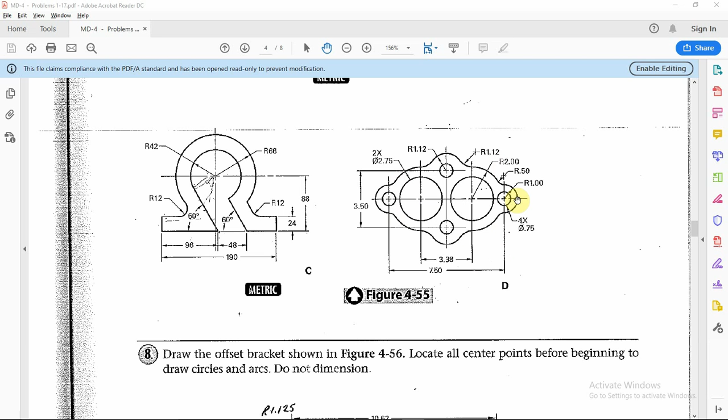So Imperial, about 7.5 wide overall, 8 or 9 wide. Height 3.5, about 5 wide. That's probably what I'm going to start with. So I am definitely going to start with these center lines. Now I have one horizontal. I have another two, what I'll call secondary horizontals. I have this primary one here. I have then a couple secondary, and a couple other secondary or tertiary, whatever you want to call them, doesn't matter. I'm going to start with the primaries, one horizontal, one vertical, to get things started off.

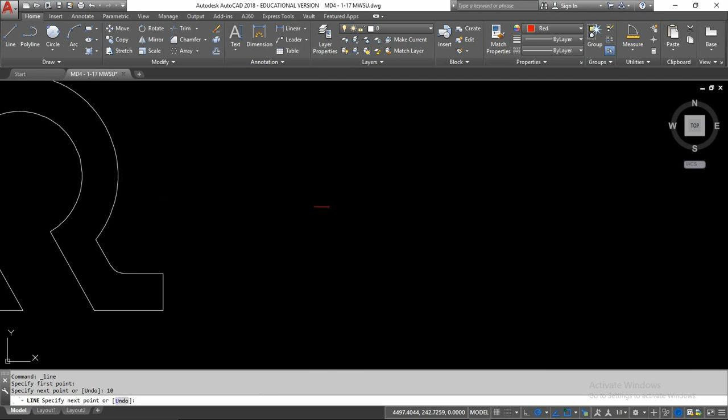So, okay, here we go. I'll go ahead and change, and this is Imperial, so I'll just start here and I will type over 7 point, no, I'll just make that 10 for now. Zoom in, and then I will do a vertical. I'll do 6 for now. Again, not really that important. You can always change it at any time.

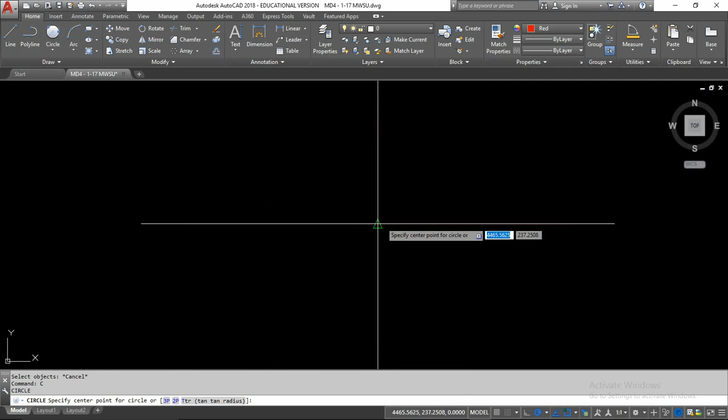Now I'm going to go ahead and do the other hidden center lines. So I'm going to go ahead and copy. Now, how far is this? Well, I'm not totally certain. I can do the math. I can divide it by 2, whatever it may be. Again, I've told you before, I like to do circles. Diameter, where that circle intersects either of those lines, is the location of the other vertical or horizontal center line. So I'll say 3.38, and copy here.

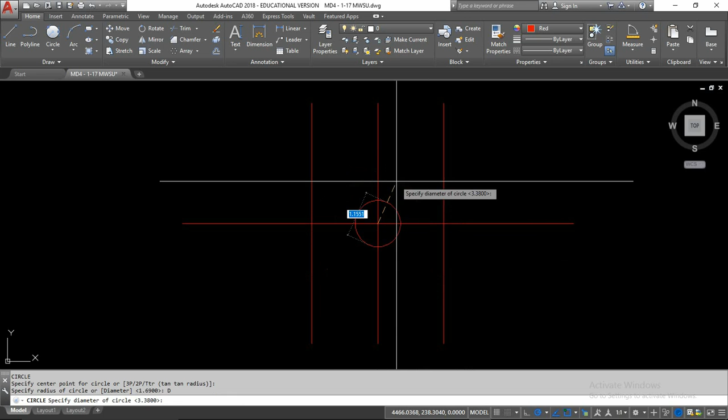Now let me go ahead and show you offset again. It's asking a distance. If you don't know the distance, you can draw it, and this one would be good to say that distance and that same distance there. The next one is, let's get rid of that circle, and let's do, again, diameter 7.5. Now I'm still doing the vertical ones. In this case, I'm just going to copy them. I don't really have enough to where offset would benefit. Again, delete. And then the horizontal, again, I'll do circle diameter of 3.5, and then copy here to here and here.

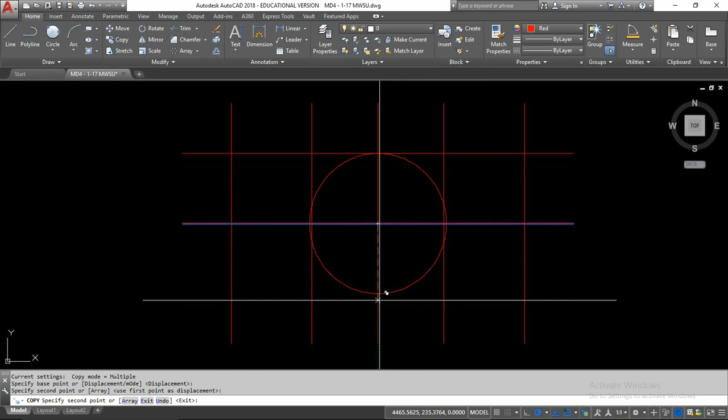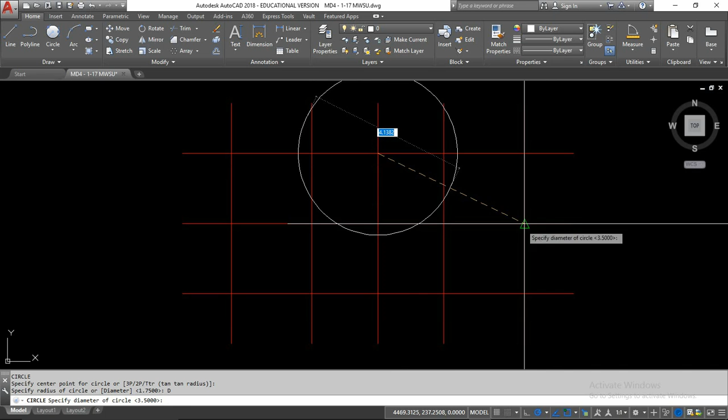Okay, so there are all my center lines. That's pretty busy in itself. And let me go ahead and change this back to by layer for color. Circle, this being the center one, the only one that exists with these are these two here. So I'll go ahead and do that. It's hard to find. There is not a dimension on this circle. It's actually located on the one over here. So 4x 0.75. And then I have one here, here, and here. Okay, starting to take shape already.

I know the larger circles are centered at the intersection of these two. So here, diameter of 2.75, and right click, click, right click. There I have that. Now, entirely up to you if you want to delete these lines. If they're getting a little busy for you, not a problem. Go ahead and delete them. You can always very quickly put them back if you change your mind. Right now, they're not bothering me.

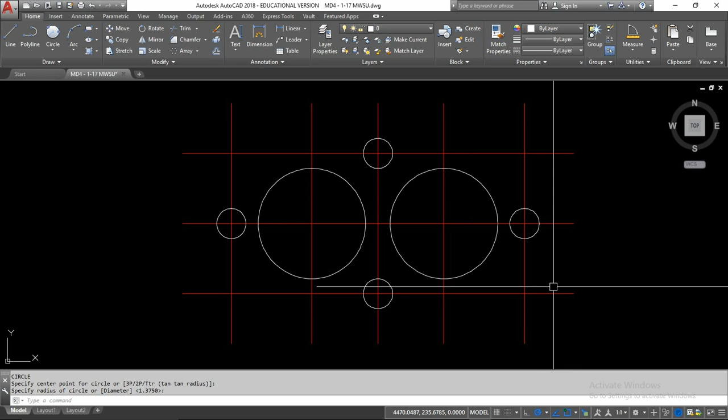So what else do I know is true? Well, the outer frame of what I would consider a gasket, that outer line, they are all arcs. They're either fillets or arcs that are concentric to each of these circles. So again, I'm going to do them as circles. And since they're arcs, they're asking for a radius. That'll be 1. 1. Now, if you want to do all of these and then go back and trim them, or trim them as you go, that's fine, entirely up to you.

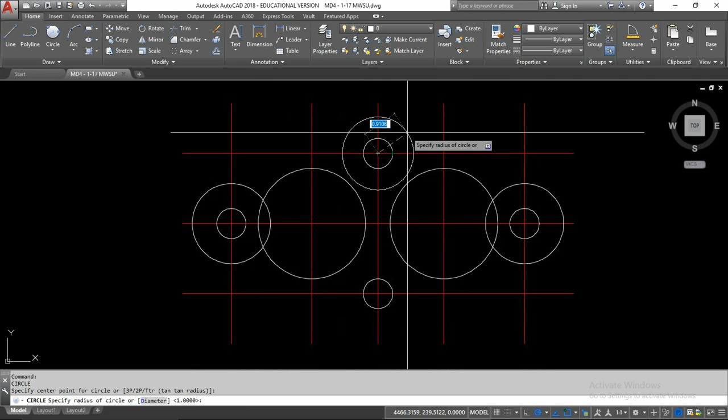This, did I click that right? Yes. And this is a 1.12. And then these two here are a 2. Okay. Now, to trim, I'm going to use these outer circles as my trimmers. That way I can just select these here. Make sure you don't accidentally select something else. Now notice I still have that little piece inside of there. Don't care. I can come back and easily erase that later. Right now I'm just wanting to make sure I get these done properly.

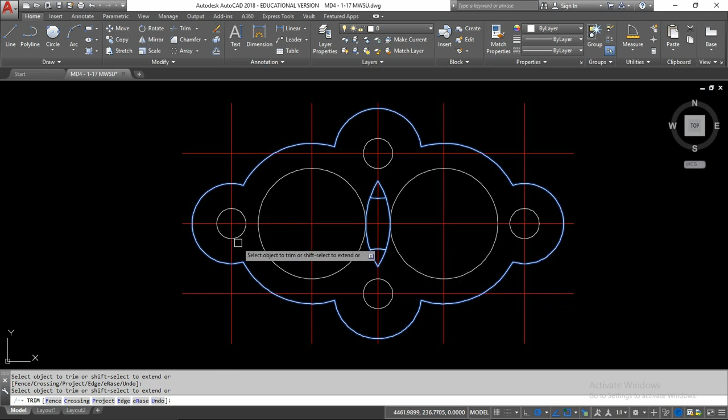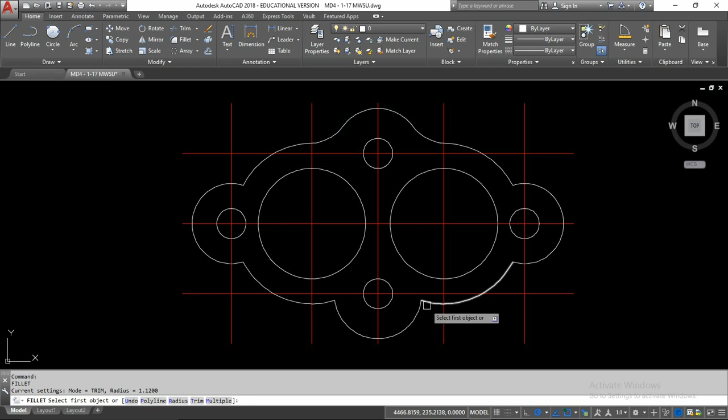Okay, now I've got this little football or whatever that is. I'll just delete that. And I'm pretty good. Now all I have left is the arcs that are fillets, or the inverted arcs. I'll just use the fillet command. And I know the 2 here, which are also the 2 down here, are a radius of 1.12. And I will click and click. In this case, it's just as quick to do this as opposed to mirror. And then fillet radius of 0.5 for these here.

Looks a little smaller here than it does in the image. That's all right. Make sure I didn't type something wrong. I'll have to double check that. Fillet radius 0.2. I did do it wrong. I mistyped. I should have been paying a little closer attention there. I'm going to put those back on there. I typed them wrong. Let's see what happens. Now, right now, these are not a polyline. They are not connected. They just happen to share endpoints.

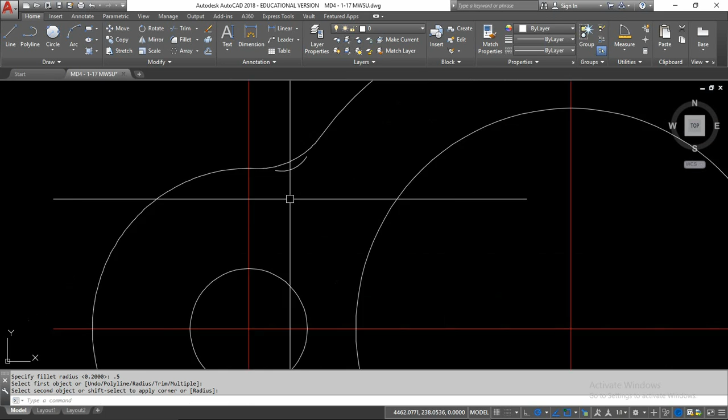But I'm going to fillet again. Fix this radius 0.5, not 0.2, and I'll do it again, clicking here and here. So because this is not a polyline, this arc is not replaced. It's just simply left there, even though these are now filleted elsewhere. So I don't have to erase each of those, fillet radius 0.5. Pay attention to my dynamic input to make sure I don't mistype it again. Okay, I've got these.

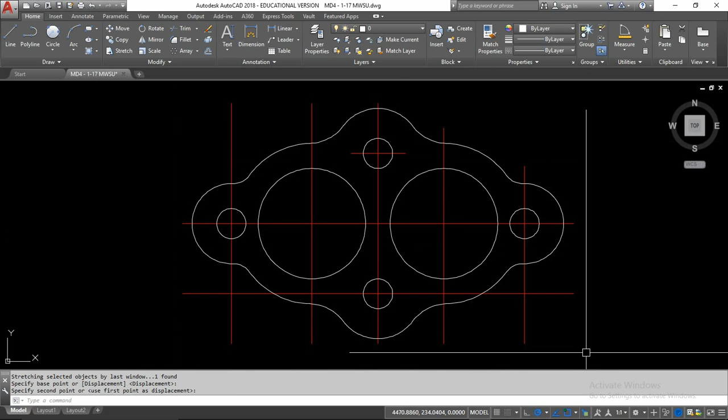And I believe I am done, with exception to, if you want, entirely up to you, modifying these to where they're not going out so far. And this really is only for that circle. It shouldn't go out past this, because this is not a center line for any of these features out here. That center line does in the drawing, because they extend for the dimensions, what's called an extension line. So you see we're cleaning that up if you want to. Otherwise, we are done.